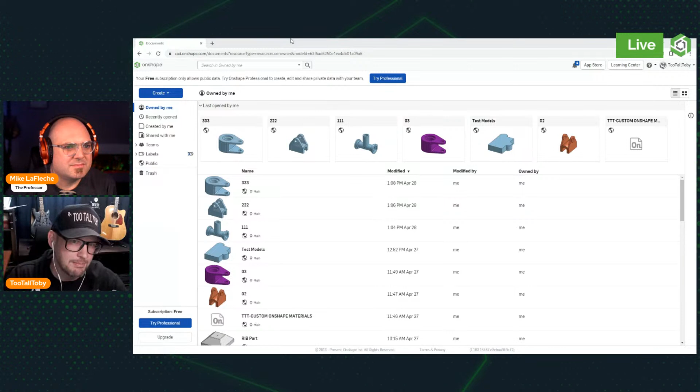The account I'm looking at on screen right now is from onshape.com/free, a totally free account. If you want to start using Onshape today, practicing and learning 3D CAD, or learning what Onshape can do, you can check out the free version. And when you and your team are ready to move up, you can even do a trial of the professional version, and you'll get even more collaboration capabilities.

For starters, just using the free version. I'm using the free version today. Mike, you're using the free version as well? That's right, I dusted it off, I haven't signed in a while to my free Michael LaFleche account. So everyone who's watching, if you want to do this and you've got some coworkers or some friends, or if you want to call your mom and say, hey mom, can you help me try out this new software, whatever it is, you can try this out totally for free.

So I'm going to start out by creating a new document. I'll call this Toby's coffee mug. Yep, totally okay to use any kind of naming, you know, old habits die hard. Okay, yeah, there you go. Toby's coffee mug, you could put an emoji if you want to, it's okay. I'm just gonna leave it at that. So we'll go Toby's coffee mug.

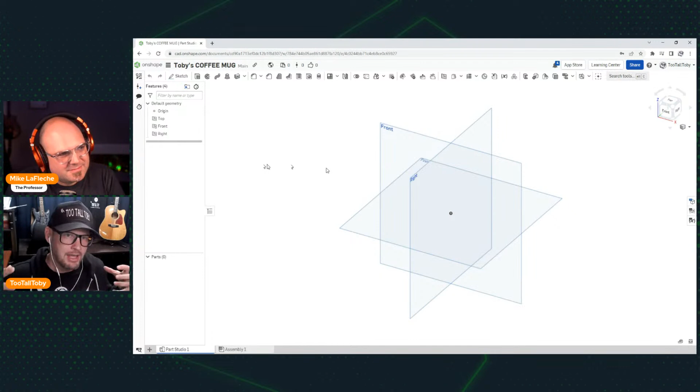And now I'm creating a new document. This isn't necessarily a single part, it's a document - kind of like a project. You can have one single part if you wanted to, you could have multiple parts, you could have an assembly, you could have drawings - whatever you want that's going to be part of this project can all be included under this one umbrella, Toby's coffee mug.

From here, I'm going to select the front plane and begin a sketch. This is very similar to maybe what you've seen in some other CAD packages. We get in here, we create our initial geometry. In this case, I'm going to create a center line, and have that come up to the height that's kind of the gap at the bottom of the coffee mug. Then I'll go through and create some additional line geometry to set me up to create a revolve feature in Onshape.

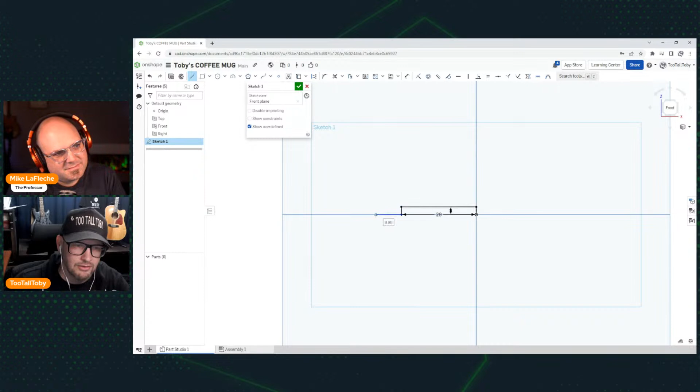So I'm going to use some basic arithmetic in the auto dimension functionality, taking the desired diameter and just dividing it in half. I'll create some more auto dimensioning here. This auto dimensioning is super helpful and definitely a skill worth developing, because you'll save yourself so much time if you take the time to hone that skill. For example, the width at the top here is going to be 4 millimeters. This is going to come down at a slight taper, and then I'll close this thing off.

All I need to do now is add a few final dimensions to fully define this sketch. We always want our sketches to be fully defined. So here I'll create a dimension that actually connects to the center line or the center plane.

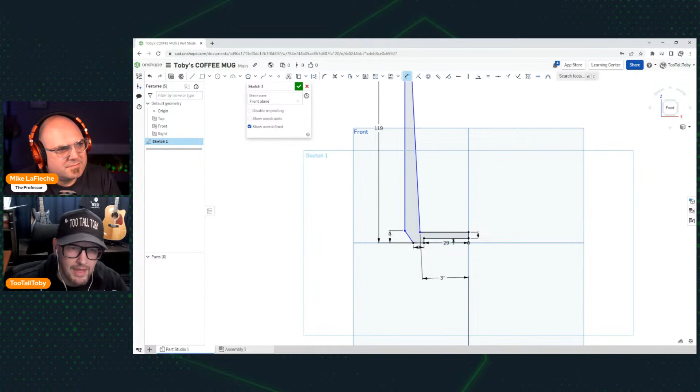Here what I'm doing is holding the control key on my keyboard and middle mouse buttoning to drag - a great way to navigate your sketches if they have a very large aspect ratio or go off the screen. Here you can see I'm using what's called the S key menu to access all my most commonly used commands. So instead of needing to remember, say, 10 different shortcuts, I only need to remember one, and I can load that up with my most commonly used commands - another really helpful tool in Onshape.

And then finally, I created that construction line in the beginning. If I create a dimension that goes across that construction line, that's going to give me what's called a doubled dimension. So when I'm defining the max diameter of this thing, I can define it at a dimension that's going to make sense to people. Certainly I could use that same functionality for some of the other dimensions to get the doubled dimension, but I think this looks pretty good.

I think I'm going to turn this into a revolve feature now. Yep, turned black - you had the shaded region, told you that it was nice, fully constrained profile, and there you go. You just have to pick the edge and go. Yeah, that's what we want.

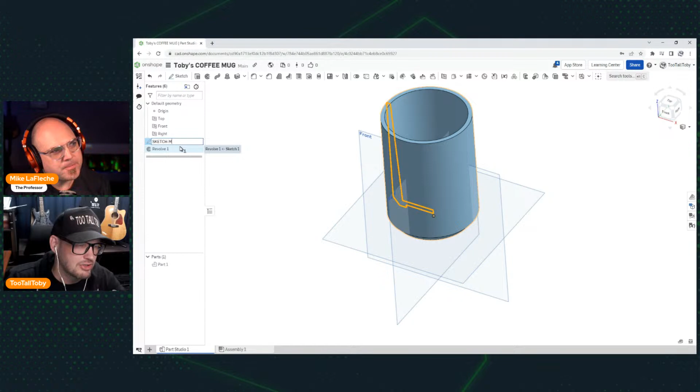For me, I do a lot of renaming. There's two ways that I found to do renaming. So I might call this one sketch, main revolve - that's one way you could do a right mouse button rename. The other way is I can double click on the feature and that brings up this box here, and then I could rename it here.

Are there any other ways to rename, Mike? Well, those are the two places you would do it. So I often do it like right as I'm making the feature, because it's right there as you're making the feature. Yeah, that makes sense.

All right, well, we've now come to the part of the presentation where we're ready to turn this into multiplayer simultaneous 3D CAD. So let's get into it now.

What I'd like to do is invite you to participate in this document. The way that I would normally do this is I would just come up here and hit this blue button that says share. Is that basically the way that you would do it? That's one way of doing it. Another way - let's put our hat on - if we're working for Coffee Mug Incorporated, you might ask me a question about the mug, right?

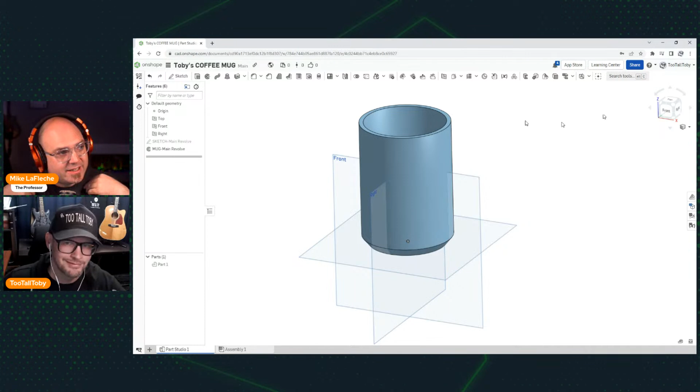Sure, using a comment. You comment on the mug somewhere and you might say, hey Mike, we're interested in putting a lid on here or something like that. Comments are a great way to do that. You can right mouse click on a feature, which will automatically tag it to that feature, a very clever way of doing that. I like that, and just like in Google Docs or Microsoft Office, you can @ somebody in. Any of these cloud type systems work like this.

And there we are - let's add a lid to the mug and add that comment. I'm going to get a notification once you hit this button to share with me, and it will share me in view only. This design essentially, and then so view only. So now that I've added you in the comment and tagged you there, you're going to be able to see - oh look, I just saw your icon here show up. Hey, how you doing?

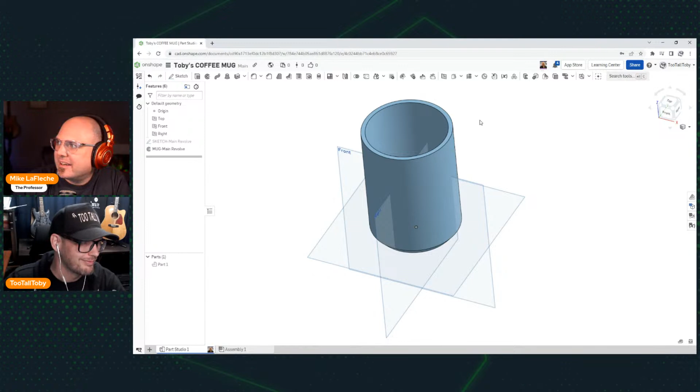So up here, I see your icon there. I can see the comment that came in and I can click it, and I can even double click on your face, or you could double click on my face, and you're going to essentially look over my shoulder. Oh okay, right, so now I'm not doing anything with the mouse.

A lot of this would be cool if we were on a voice chat together - if we jumped into Slack or Discord, jumped onto a voice chat, then you and I can talk through this model and very clearly communicate what one another is thinking without having to start up a Zoom call or anything. I can even just call you on the phone, right? Exactly, you just pick your communicative poison and go at it.

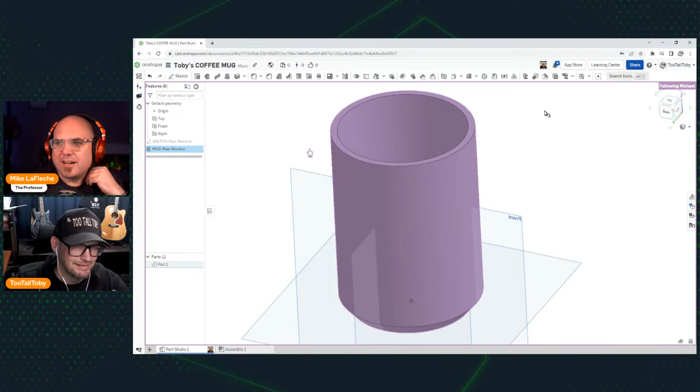But having this nice view where you can see what I'm looking at - you can see even what I'm pointing at, see the cursor changes to a finger, right? And you can just click anywhere on the screen and it would take back your viewpoint. So if you wanted to look at the underside or anything else, you just kind of take over. It's much easier to see what I'm doing - as I'm rotating, does that happen on your screen as well? Let me double click here and now you can see that I'm following you.

Okay, it's not like that Sting song where I'll be watching you and you don't know. Yeah, we know, you know, right? You can see I'm here, and it even told you.

So then I could say, hey Michael, thanks for following me. What I really would like to do is put a lid on here. I'm going to draw the handle here on the front plane. So maybe it would make sense if you built the hinge for the lid over here on the right plane, something like that.

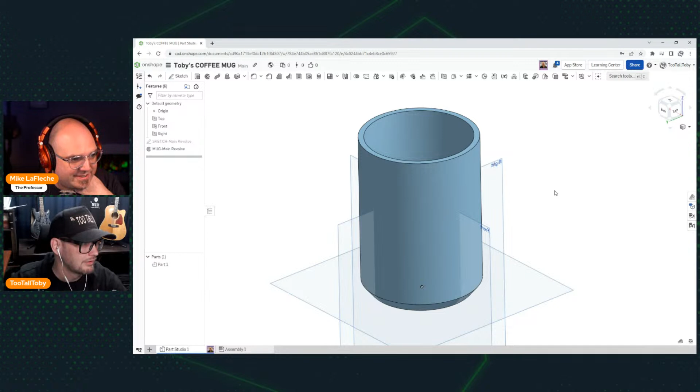And you can see what I'm highlighting. Even though we're not screen sharing, you could still see everything that I'm highlighting. I mean, just to show you, I'll put my screen up here for a second.

Just so you can see what my screen looks like. So my screen, I'm view only in the document right now, because that's the way it's shared initially. You share with the most conservative permission, and then you can give me any additional rights that you want. So I'm moving it on my screen and you can see what I'm doing on your screen.

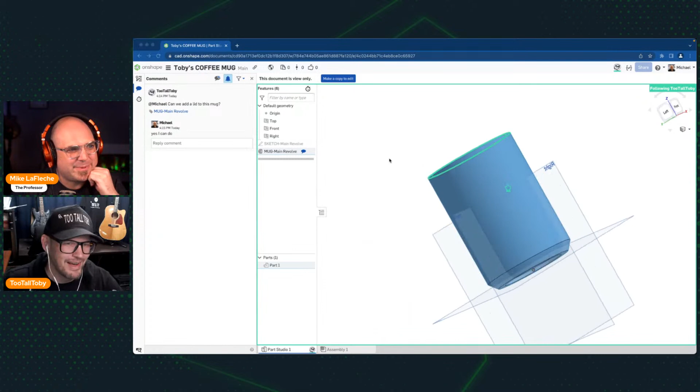That's very cool. So we don't even have to screen share, we can just talk about this. I could say, hey Mike, let's add the lid up here. Let's make the hinge for the lid here on the right plane. You can see right away what I'm doing.

And it looks like, if I'm not mistaken, in the upper left on your screen, are those Mac icons? Oh yeah, that's right, I'm on a Mac. So you're on a Mac, I'm on a PC, and no problem with us playing multiplayer. Yeah, multiplayer cross-platform, okay, I like it. All right, I'm gonna add it back as the main window now.

Okay, all right, so we discuss our game plan. We're gonna say, I'm gonna draw the handle here on the front plane, you're gonna do the hinge here on the right plane. And now, what if you were to start? Can you just start modeling now? Are we good to go? Is that it? Not yet.

You need to just update my sharing permissions on the big blue share button now, because you're view only still. All right, cool. So we'll do share, and here is... those should look familiar, right? I mean, this screen looks exactly like any cloud-based sharing. So if you hit that pencil, you can go from view to edit.

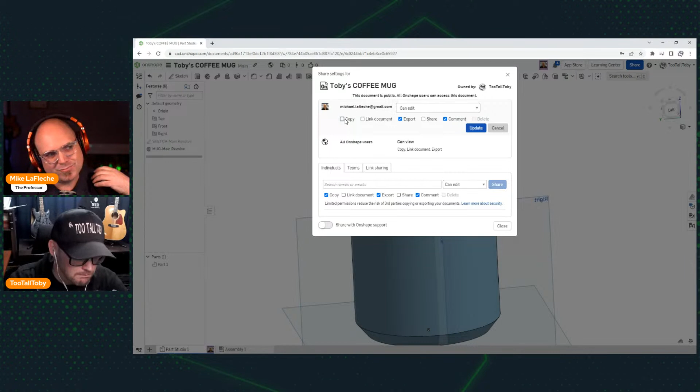And you can also tick off or on any of these really interesting choices that, if you really think about it, you don't have in a file-based system. If you send somebody a file, you can't stop them from copying it, and you can't stop them from opening it in another system and exporting it. So these are much different levels of permission.

So if I uncheck this, then you're not going to be able to just make a step file and take it out of our system. I could uncheck these to make sure that it just stays within our team.

All right, well, I'm going to say can edit. I know everybody's excited to see what happens if you make a feature. So here I am looking at this model, I'm not doing anything on my screen, my hands are up here. And if we notice over here on the left, we can see that Onshape is letting us know that Mike is making a new feature now. This is really what it comes down to, this idea of multiplayer simultaneous 3D CAD.

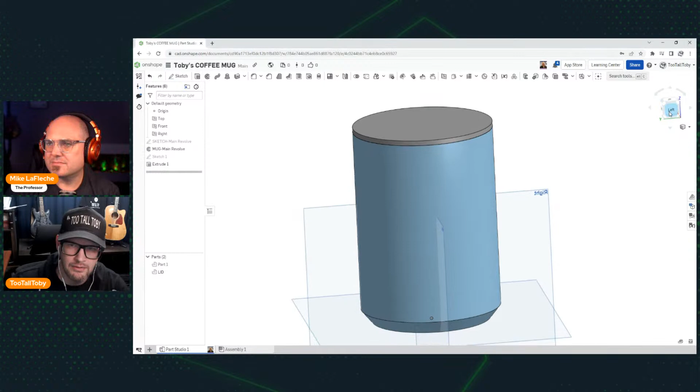So while Michael's going through making that feature, I'm going to take a look at the questions here that came in. Question from All Day says, does the tripod in the upper right corner change the view? Yes, it does. You just click on the little cube here, and you can use that to get into the specific view that you're hoping for.

And wow, look, it looks like we've got a new feature on this model. So Mike was able to get in there and make a new feature.

And like I said in the beginning, the cool thing about Onshape is that it can either be a single part file environment or multiple parts in one single environment. You're really not limited. In this case, we can see that Mike decided to make the lid here as a new part, almost like a new body, but really it's a new part in the part studio.

That's right. The way it works is it's kind of like top-down modeling, where you can create multiple parts together that are contextually related. You wouldn't design a 787 airliner in one part studio, but you might go into the flight deck and model several parts of a control device, a stick or whatever it might be, together because they're related. You don't have to split things out into separate files when you do it this way in Onshape, because everything's a database operation.

But in this case, you made a new part essentially. What about the mug? Are you able to actually add features to the mug part, like a flange where you're gonna have the hinge or something like that?

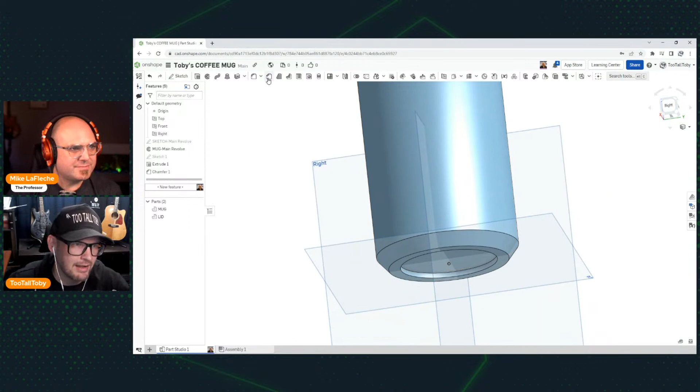Yeah, totally. I'm renaming it to the mug now because seeing it called part 1 was freaking me out. Now I can actually go in and start modeling things for the mug as well. I might be down here towards the bottom adding a fillet, just a regular old plain Jane fillet here at the bottom.

Yeah, that looks pretty good. Round that off a little bit at the bottom. And I'm down here making features, working through this part. What's gonna happen if you're working on that part at the same time? Is everything gonna go crazy?

Oh, I see a new sketch was created. Yep, so there's a new sketch, cool, right? And I am extruding a new part right here. One other thing, let me just fix that sketch a little bit. Yeah, you might end up with a zero thickness there. Rookie mistake.

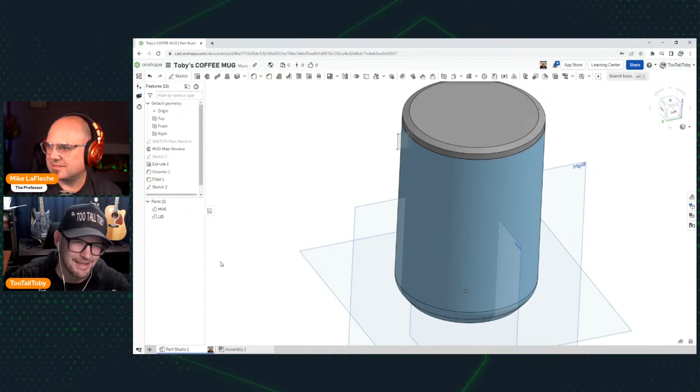Eduardo in the chat is saying, Hey Toby, when you see branches and merges, you're gonna love it. Yeah, I've already seen a little bit of it, Eduardo, but I know that is absolutely where I want to be. It's just like GitHub, so I'm definitely in.

But I just extruded that, and I told it to attach itself to the mug and not the lid. So when you extrude something, if you double click extrude to there, Toby, you'll see. I created a new solid and I just extruded it symmetrically, and I told it the merge scope was with the mug instead of the lid in this case.

Okay, so now that's part of this, I hid the lid here on my screen. Yeah, that's part of this same part. So I'm down here working in one section of this part, adding fillets, and you're up here adding boss extrude geometry, cut extrude geometry. And yeah, there's no problem.

No problem. Go to the version tree there. So cool, you see the version tree at the top? You can create versions, but see that? If you hit show changes, it'll show each individual edit and who did what and when. Wow, right? It even shows me hiding and showing that lid, huh? Yeah, so everything is an operation. If you click into it, it brings you to that moment in time.

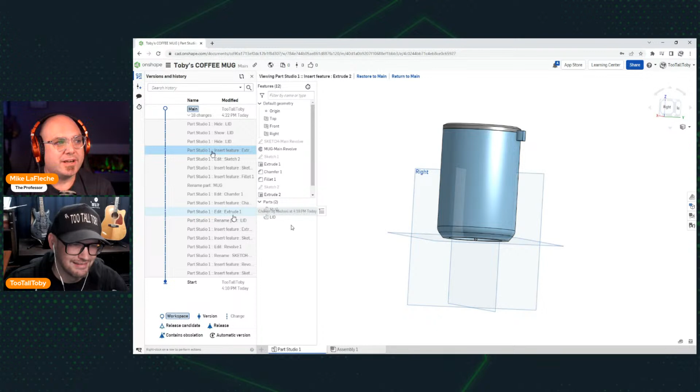Okay, wow, so this is like unlimited undo. Unlimited undo forever and ever, right? Even after you close the session, right? It's the entire history tree, and you can look at it in any moment. This is not something that's available in any other system that I can think of.

So this button up here can almost be like a learning tool, right? Because in the Onshape documents page, there's a section called public where you can see all the documents that are public. And if there was something in there that you looked at and thought was really cool, you could actually roll through step by step and see how the person built it. Yeah, wow, that is powerful.

And you can even create versions from these and branch off, as Eduardo was mentioning. So instead of doing a save as copy or a pack and go, you would just branch from whatever the latest moment is, or any other moment in the past, and try something new from that point in time.

All right, cool. Well, I think what I'm going to do is let you start working on the lid, and I'll go through and work on the mug. But we do have some good questions coming in.

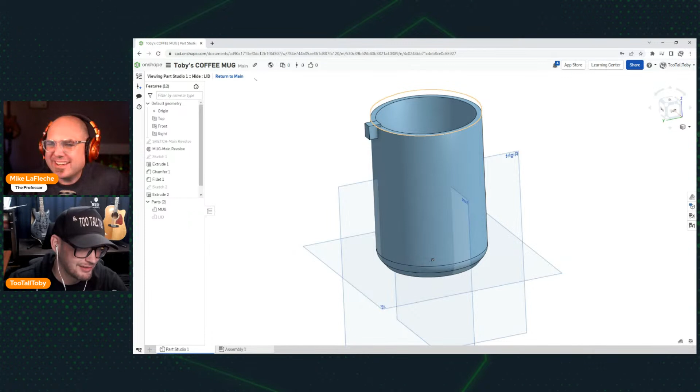One question was about MBD, model-based definition. It's a pretty cool subject where you can have 3D dimensional information on your model instead of a 2D drawing. Most people would use it for that. Most people in the world of Onshape still want drawings, so we didn't make MBD yet. We do kind of sort of do some model-based things, if you will, but I wouldn't call it what people are asking for with model-based definition.

But take a look, we don't have any holes in here yet. I'm going to put some holes in a second to put a pin in for the hinge, and I'll show that later. We'll come back to that.

Model-based definition, of course, can be a way of getting away from drawings, but it can also be used in coordination with drawings. Ultimately, when you get deeper into MBD, you learn it gives you a little less chance of failure during the inspection process. The inspection process isn't as rigid, but it's more meaningful the way you do the inspection. It allows you to do a more mature version of the inspection process once you really learn about MBD. It's good, not in Onshape yet, but on the roadmap.

Very good to hear. Alrighty, and I'm looking here, I see some nice comments from Patrick. I'm going to save them for the end and just keep looking through to see if there are any other questions.

Does anyone know if there's an easy way to export different part types, like sheet metal parts, for milling parts? Well, certainly, whenever you're in Onshape, you can take your part studio down here in the tab at the bottom, right mouse button, and choose export. So that's a way for you to... oh, I wonder if I somehow disabled the export.

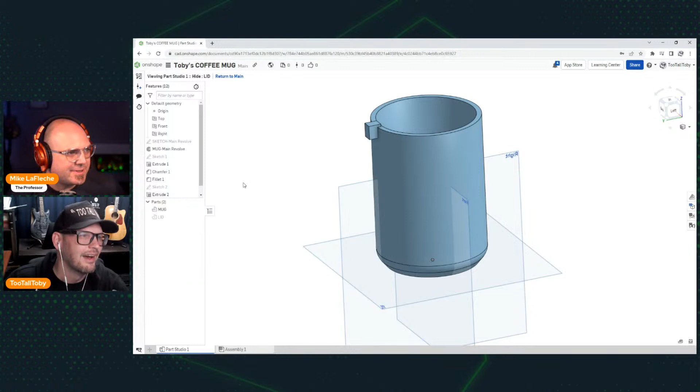Oh well, you're in just a version right now, so hit return to main up there at the top, it's in blue, or you can click that too. So then if we go down here to this tab, you can right mouse button and choose export, and that should get you out to some exporting options. If it's sheet metal, you'd want to turn it into a flat first, and then take a look at your exporting options.

Yeah, some great discussion in here. I know you guys are discussing some things on your own as well, so I'm going to let you keep discussing. I'm not going to necessarily jump in, but I see you guys did continue with that discussion, I love it. Eduardo has to drop, I'll see you later, bro.

Toby, what fundamental features in SolidWorks are missing from Onshape that you would like to see implemented? I think there was one thing I was thinking about, and I can't remember what it was. There's a lot of stuff obviously in a CAD system, and since we started with a clean sheet of paper, we may have things that aren't in the old systems, but vice versa, there are things not in Onshape that might be in other systems because we do it a different way.

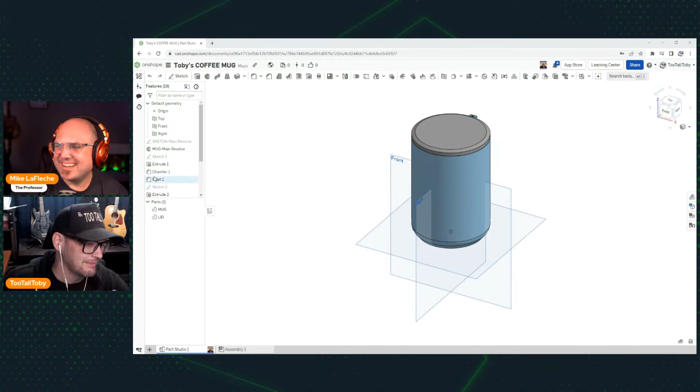Or, you know what it was? Actually it was something I was thinking about earlier today when we were talking, it was being able to press F2 when you go into rename. I kept thinking, what is the shortcut to rename in Onshape? That was honestly the biggest thing. Whenever I go to the tree, I keep pressing F2 and I'm like, oh come on, I should be able to rename with F2. It's Shift N. Okay, let's go, I like it, we're going to be using that for this whole presentation.

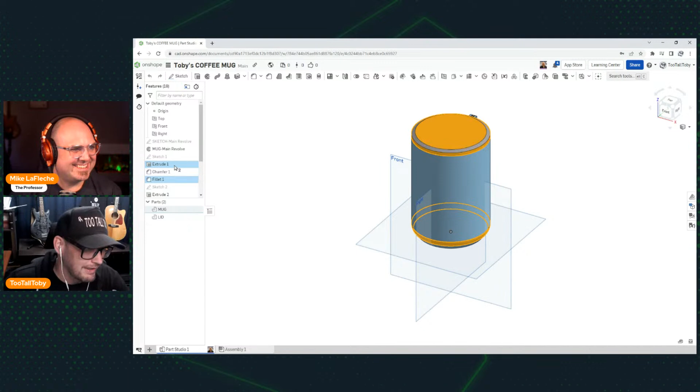Okay, so this fillet here, with Shift N, is the lower outer body fillet. Okay, all right, I'm happy now. So to answer your question, nothing, there's nothing in SolidWorks that is missing from Onshape. That was the only one, and I can adjust to Shift N from F2. So we're golden there.

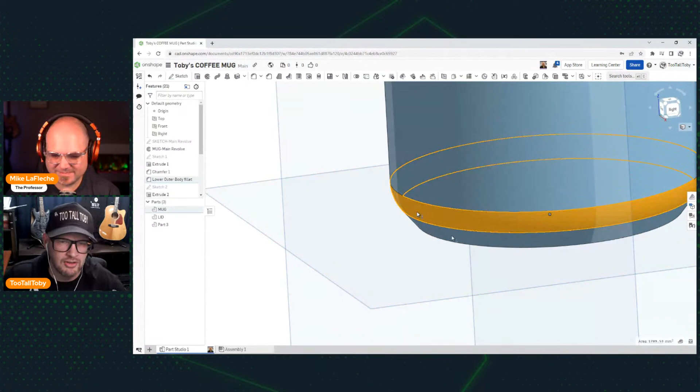This feature here was just a standard fillet, tangent to this face, and that was it. Now I'm going to create another feature down at the bottom underneath the model. I'll press the S key, jump into my fillet command, and create a fillet here with a 10 millimeter radius.

As we can see from the preview, we are losing the original edge in order to get that fillet in place. This is a fillet overflow scenario—something you should be aware of when working with the fillet command in any CAD system, and you should be aware of how the CAD system is going to respond. The original edge is being moved to facilitate that fillet size; it's a little bit too large.

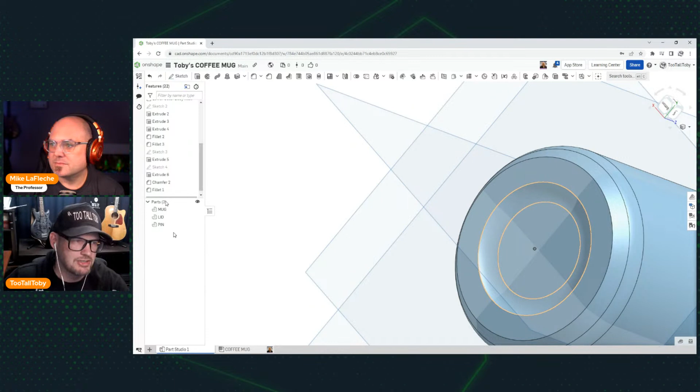If we click on this edge, we can see that's giving us a distance of a little over 52 millimeters. But in the definition of that fillet, there's an option here for allow edge overflow.

I'm going to try and zoom in here and see if that comes through on the live stream. I just want to make sure I'm watching my monitoring here. But you can see in the fillet property manager, there's this option for allow edge overflow.

When allow edge overflow is checked on, that means it's going to adjust that option. So if I uncheck that, you see the edge goes back to the original distance, the original dimension here, which was a dimension of 58. That's the dimension coming from my sketch.

That's the first thing I wanted to show you with fillets. I'm going to pick on this fillet in the tree here and shift N so I can rename it. I'll call that lowermost fillet, underside fillet—and that one is using that kind of overflow fillet type.

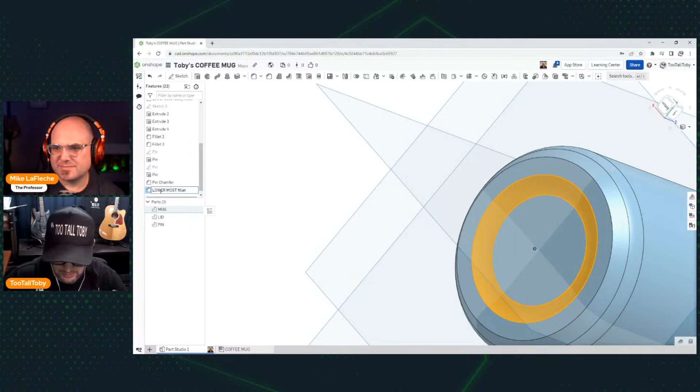I'll do a shift N here again and call this one overflow fillet, meaning that the radius was too large for the surrounding geometry, but Onshape has no problem solving that geometry.

Now, another type of fillet you can utilize in Onshape—I think this is really cool. I'm going to right mouse button on this right plane and choose section view right from the right mouse button command, so we can take a look inside and see what's going on. Now I'm going to add another fillet command and add a fillet to this lower edge on the inside.

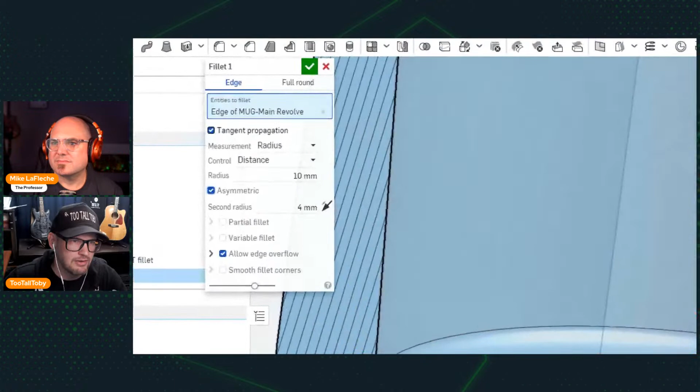Instead of this being a complete round fillet using constant radius throughout, I'm going to change this option for asymmetric. When I choose asymmetric, now I have two different radii. If we look at the fillet itself, the fillet has become more of an ellipse than a constant arc.

That's another really powerful tool in Onshape. If you're ever in a spot where you need something non-uniform or non-symmetric—you don't want it to be a constant arc, usually in spots where you want it rounded, but because of other faces in that region you just can't fit the radius you want—sometimes if you switch to asymmetric, you can get the fillet you need and still have that rounding off.

So that's another type of fillet that's good to know about in Onshape, the asymmetric. I'll call this one lower inner fillet.

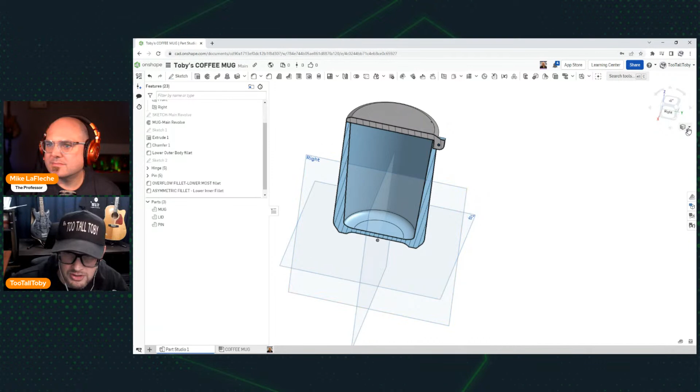And then the final type of fillet that I just wanted to tell you guys about, so you know it exists here in Onshape. I'll switch back from the section view and hide the lid. We can see Mike's still going through, making great progress with the lid and the hinge, and even adding in a pin.

But another type of fillet option we've got is full round. We can see that the full round option is on this other tab. We just pick our two sides to fillet, and then pick this top face here. I really like how Onshape just auto advances through that process.

Normally that would round off this top face, but it's going to run into a challenge here because of this hinge. So I might need to roll back earlier in the design to do that full round fillet. Let's see what happens. I don't know if that'll affect Mike, but if it does, it's fear free, I'm not going to lose anything.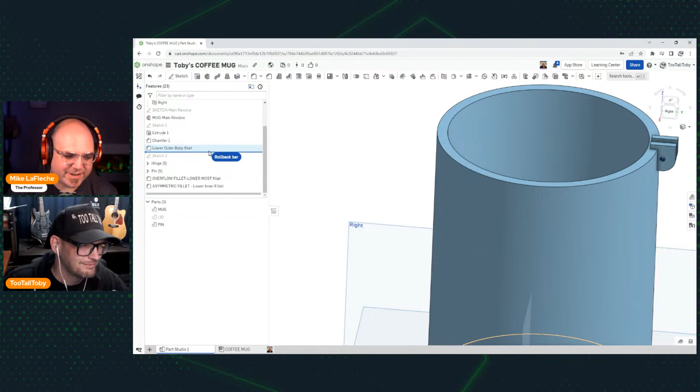Yeah, exactly. So we can say full round fillet, this face, and this face. You just pick the 1, 2, 3 faces and hit the check mark. And there we go, we get a full round fillet.

The nice thing is that's dependent on the angle of this interface, because I put that draft on. It's not a constant radius or necessarily an easily defined radius, but it's still able to do that full round fillet, no problem. It just bases that on the other geometry.

So we'll call this one full round fillet, top lip. Sometimes we want to keep this type of geometry, sometimes we want to suppress it.

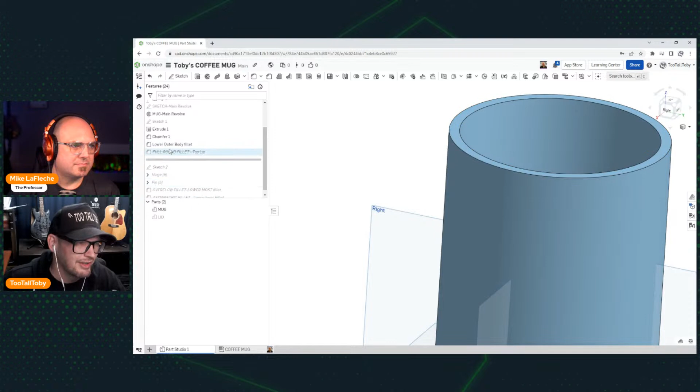If we right mouse button here, we can choose suppress. I like the way Onshape gives you a line right through that feature, so you know it's suppressed. We could also unsuppress it to see the downstream ramifications, and in this case it doesn't look like there's any. It just works.

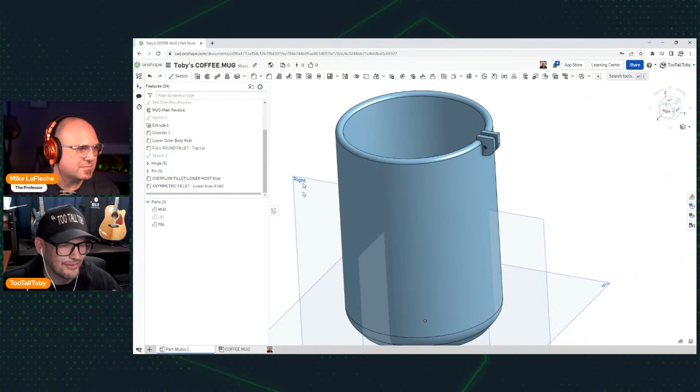Yep, looks like everything works. My assembly is still working. I've been building an assembly while you're doing this too. Oh, wow, okay, I can't wait to see that. So you're building an assembly while I'm in here building the part. Yeah, I could see my assembly updating with all your changes while you're doing that.

So there's no question about what the latest state of a design is. There's no hieroglyphic system in PDM, no 'do I have the latest version', no 'do I need to reload', no 'do I need to open and get the file'. None of that enters my mind anymore, it's just there. Very cool, very, very cool.

All right, let's get in here and start making the next feature, the handle for this thing. So I'm going to hide the lid again, I'm just hiding and showing these different parts of this design. I'm going to go to the front plane and begin a sketch there.

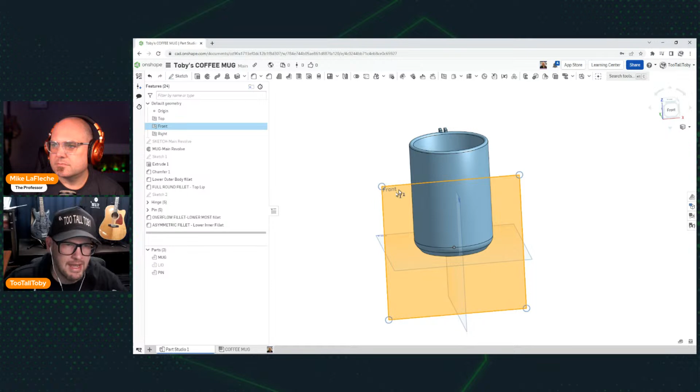Then I'm going to look for the insert picture command, but I'm not really sure where that is in Onshape since I'm not that familiar with it. So I can use the search tools functionality in the upper right and type in something like 'picture'. It asks, do you mean insert DXF or DWG? No. Do you mean insert image? Yes. So even though it wasn't the right word, everything's keyworded so that as long as you get close, Onshape directs you to the command.

So I'll do insert image here, it looks like it's in one of these flyout menus, and I'll click it to begin the command. Now I'm ready to import an image. I'm going to import this image I took of the World's Best Sister-in-Law mug here.

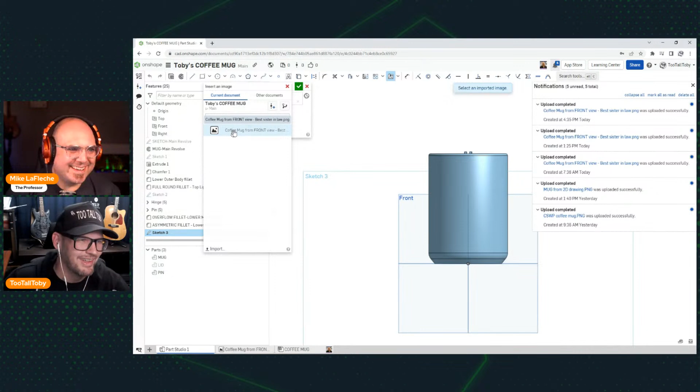So we bring this in, and Onshape says draw an image rectangle. I'll get in here and just draw one. We can see that it automatically sizes the image to the rectangle I drew. What's nice is that this rectangle has parameters, it's parametric, meaning I can assign relationships to it.

So in this case, I took the picture and cropped it, but I left just a little bit of a buffer around the outside, so I can include that in my dimension, which in this case is about 2.5 millimeters. Then I can resize the image and it kind of stays on that lower line based on that 2.5 millimeters, and ultimately I can get this thing more or less in place.

Of course, you're always going to be dealing with things like distortion from perspective when you try to take photos and bring them into a CAD system. But we can mitigate that as best we can and leave ourselves with a result that should work out pretty well. So now that I've got that image in place, I'm ready to get in.

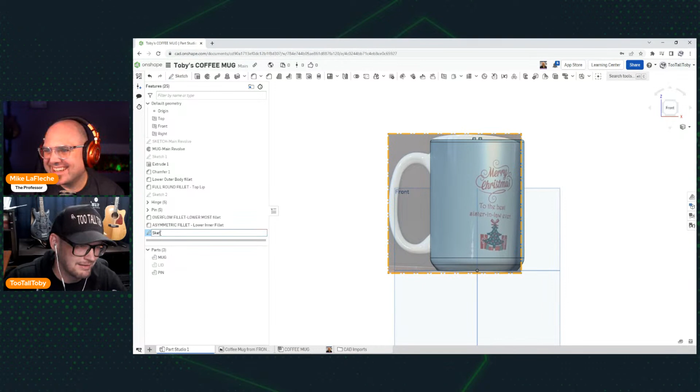I'm going to Shift N, my new favorite shortcut. I'm going to call this one a sketch, image of mug. And then I'm going to once again go to the front plane and begin a sketch.

Now I'm going to create some splines, and we're going to use this Bezier spline option. This is called different things in different CAD packages, but in this case, what it means is that instead of drawing a spline by dropping in points and getting the spline right away, you create a spline by really creating kind of a polygon. So we've got these control points here that we can drag around in order to get the desired result.

And we can also add relationships to these control points. So for example, I could take these two control points here and make them vertical, and that's going to help me when I go to mirror the handle a little bit later on in this project. And so we can drag these points around.

We can add sketch relationships, we can add dimensions to these things. I don't think it necessarily has to exactly follow that existing curve. I think if I can just get it close, it'll make me happy.

One thing about Onshape that I learned, which I think is really helpful, is that I don't have to do these two separate curves in separate sketches. So I could just make this one curve here, maybe give it a dimension from, in this case, I'm actually dimensioning it to that rectangle that I used to size the image. And then I can also lock down a location for this thing.

Actually, I want that to be from the bottom of the mug to that point there. And so now I've got a nice location that represents the very center of that handle. I'll make that a little bit higher—I think I'll make it like 62. There we go, and I've got a nice spline here, which is more or less following the handle.

Now what I can do is I can create another Bezier spline right over here, and I can give this one a horizontal relationship to the original. I can give it a coincident relationship to this vertical line here because I'm just kind of following that outer perimeter of the layout image.

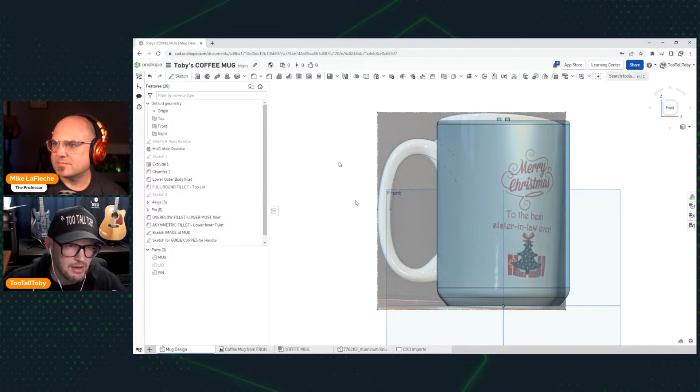And now from here, what I can do is I can create some planes. So I'm going to create a plane here using the curve and point option, and that's going to be a plane that I'm going to create right here at the end point of this curve. Then I'm going to do another plane, this time using the plane point option—just some different ways of creating planes here in Onshape. This is going to be parallel to the top plane, and it's going to exist at this point here.

Now that I've got those two planes, these would be renamed—this would be something like plane for profile 2.

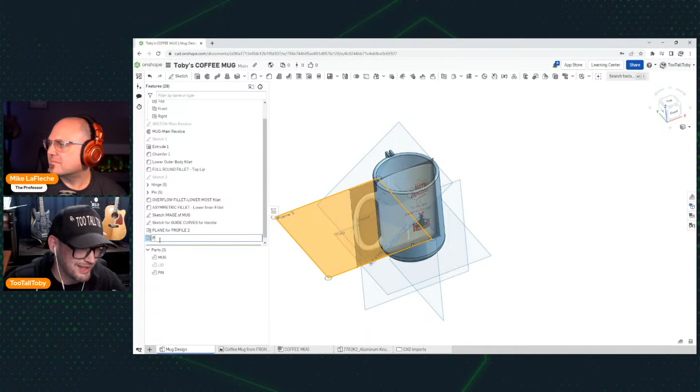And this would be something like plane for profile 1. I pressed F2 again there by accident. Profile 1, there we go. You want to rename those planes.

It's always good to rename your planes. And then on this plane here, I'm going to begin a sketch, and I'm going to create an ellipse.

One thing I noticed about the ellipse command in Onshape is that it automatically knows where the quadrant points are supposed to be. But sometimes it's still helpful to go in and drop a point manually, and you can pick up a relationship to the quadrant point. That can be helpful in this case to pierce that profile to the guide curve.

It can also be helpful for things like alignment. If you ever create an ellipse in Onshape and need to establish the alignment, you could take these two points here and make them horizontal. That's going to help avoid this thing from spinning or twisting along the loft. Piercing this to the guide curves is also certainly going to help it from twisting along the loft, but it's just a little something I noticed that's a bit different from other CAD packages I've worked in.

And then we can add in our max dimension here for that ellipse. I think that's going to be about 16.5 — that's what I measured on the physical model. Of course, we're just using this physical model, this best sister-in-law ever, as a foundation to set us up for the custom version that we create later.

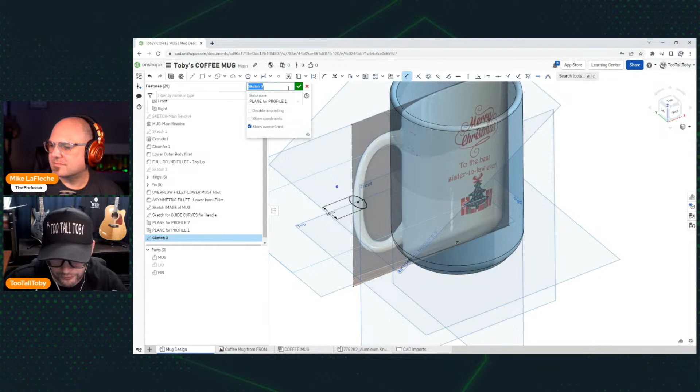And so that gives us our sketch here. Like Mike mentioned earlier, I could also rename this one to sketch profile 1, something like that. And then I hit the green check mark. And then what I like to do at this point is right mouse button on that sketch and choose copy sketch.

And then I can choose my plane for profile 2, and I can choose to paste sketch. That saves me the step of having to draw that extra point in there, or anything I already did, maybe the dimension that represents the width of that. I already have that dimension there waiting for me. And this point, I can just kind of drop right onto that quadrant point.

So now I'm ready to pierce that quadrant point to my guide curve, pierce that into place, and then I'll pierce down here into this guide curve. That gives us our ellipse in that location, and I think that's looking pretty good. Yeah, and that's great — that was nice and quick too.

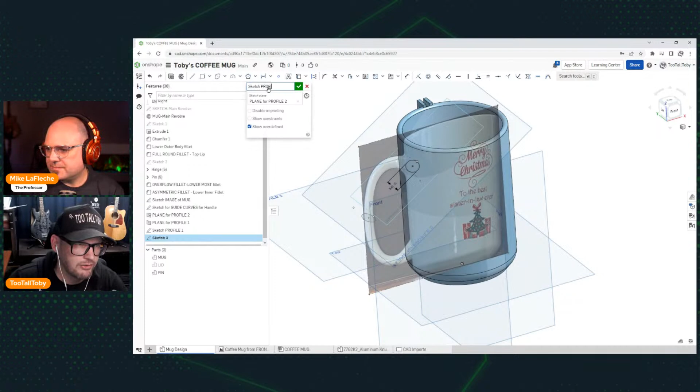So we'll call this one sketch profile 2, and let's turn that into a loft. So now we're going to use the loft command in Onshape, and we're going to say that we're going to loft from this profile to this profile here.

There's a couple ways we can pick this profile on the inside, but in this case it doesn't really matter where I select that profile, because I'm going to be using the guide curves to help establish this path. So when I choose this guide curve here, you can see this ellipse is blending into this ellipse, but following that guide curve on the inside. Then I'll choose this guide curve here as well. And wow, that looks pretty good.

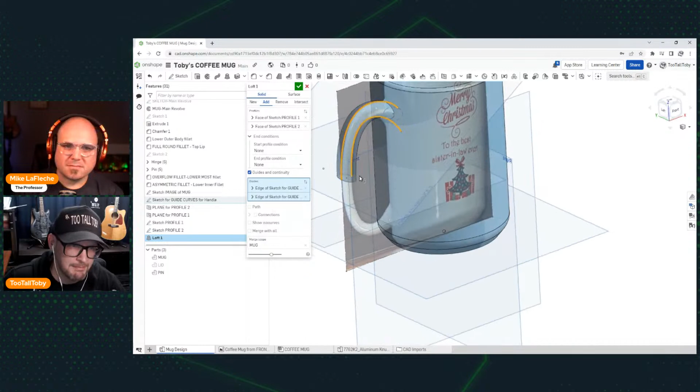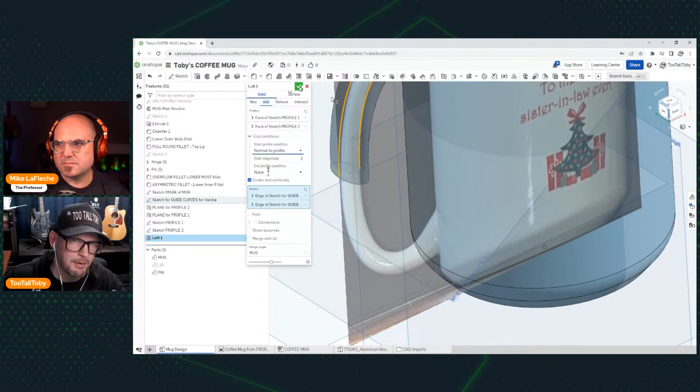Now, when I created those splines, I created a vertical relationship so the spline starts out going perpendicular to my sketch plane. But there's an option when you're in the loft to say I want all the faces, the entire face running around the perimeter of this loft, to start out perpendicular to my sketch plane. We can do that using this option here, normal to profile. It's a subtle difference, but you'll notice it when you go to mirror if they aren't set up to be exactly perpendicular to that sketch plane, because that's also going to be our mirror plane.

So we can hit the green check mark here. We can shift-N on that feature, and we can call that handle loft for mug. I think I spelled handle wrong — I'm leaving it, a little signature.

So now at this point, we could use the P command to hide all the planes. We could also hide this sketch here for the image of the mug. This is really coming together nicely. We're going to have to do a little bit of cleanup on the inside — I'll get there in just a moment. But the last thing I want to show you before we jump back to the multiplayer simultaneous session is one last fillet option.

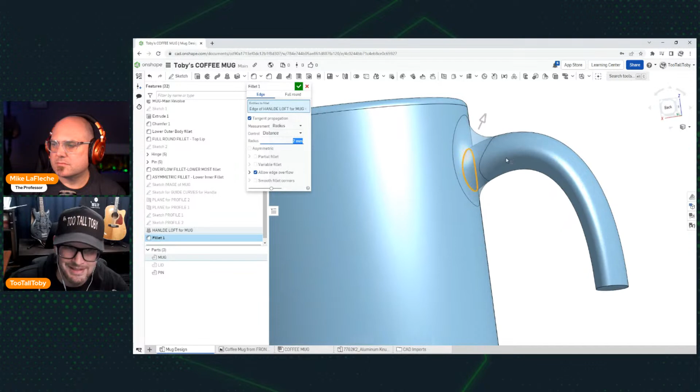And that's the option for what's called constant width. Let's say we're going to create a fillet here with a radius of 7 millimeters. This fillet looks okay, but you'll notice it looks a little heavier on the top and less so on the bottom. That's because the way this handle is merging into the body, it's coming in at a lot of different angles. So even though it's a constant radius all the way through, in my opinion, aesthetically, it just doesn't look good.

So what I can do is change this option here from radius to width. Now what I'm doing is saying I want the chord width to be constant all around this fillet. Let's make that the same value of 7, just so we can compare apples to apples. But I just think that looks so much better. It looks so much cleaner.

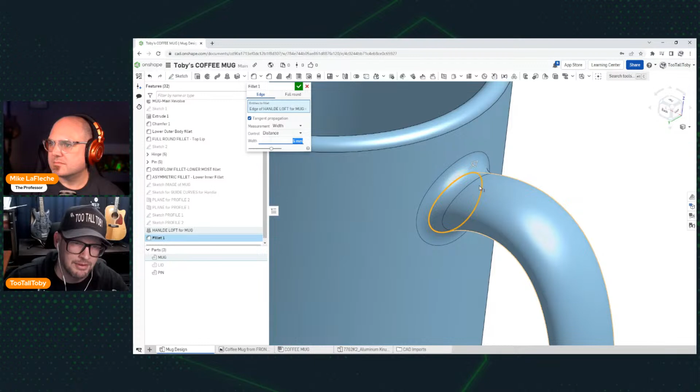Especially if we dial it down even further, to like 5 millimeters. Now it is a non-uniform radius, a variable radius running around the outside of this to maintain that chord distance. But aesthetically, you're going to find a lot of spaces where this looks really good. When you've got a lot of different angles coming together, draft coming into pockets, into corners, this is a great option to know about because it can really clean up your designs and make them look very aesthetically pleasing.

And if you're really working with somebody who's concerned about curvature and continuity, you can go in here under control and change that to curvature. Now you can see the profile is no longer an arc, but more of a spline where it's starting out trying to match the curvature of the handle, then blending into the radius, and then blending into this face up here, matching the curvature of the mug itself. That's how you can get even more dialed in with regards to curvature and making sure you have matching curvature. And you can't see edges as well.

If you hold this thing under a lot of lighting, if it didn't have that curvature continuous, you might actually see a slight seam there. This will really help to prevent that as well.

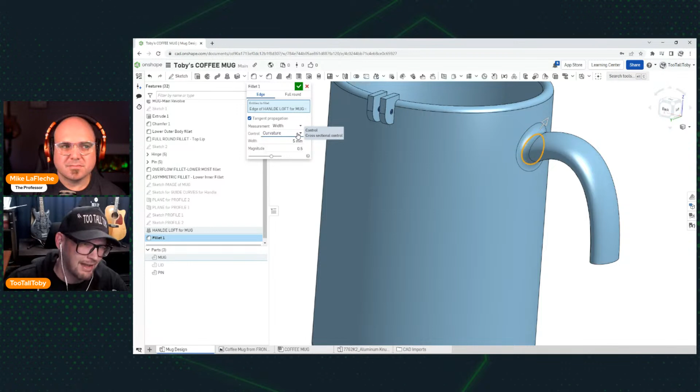So that gives me those features, and I think I'm ready now to mirror those features. Let's rename this one. We'll call this one constant width fillet at top of handle.

Yeah, Patrick's making a good point here. It says constant width is good for aesthetics, but can be very difficult to define precisely. Yeah, you're absolutely right. It's one of those features that you really aren't going to be able to measure and convey to a machinist. It's something they're going to have to do with multi-axis CNC in order to really get it correct. It's not something you're going to be able to necessarily inspect. It's more like, if it looks good, it is good.

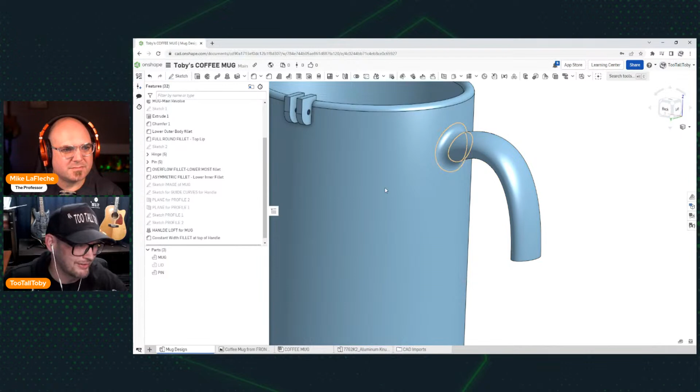Great point there. And so now the final feature that I think I need to do here is just a mirror, a feature mirror. This will be of the handle and of that fillet. And then the mirror plane could be this face here that I created. Look at that, I love the way Onshape gives us that nice preview.

There's also a trick here in the view settings where you can go to your tangent edges and say show your tangent edges in Phantom. That's a good way to check to see if you have any hard edges on your model. Or you can even take it a step further, go to tangent edges and just say hidden. Now anytime there's a hard edge, it'll show up. Like we can see here, this hinge that's got a hard edge.

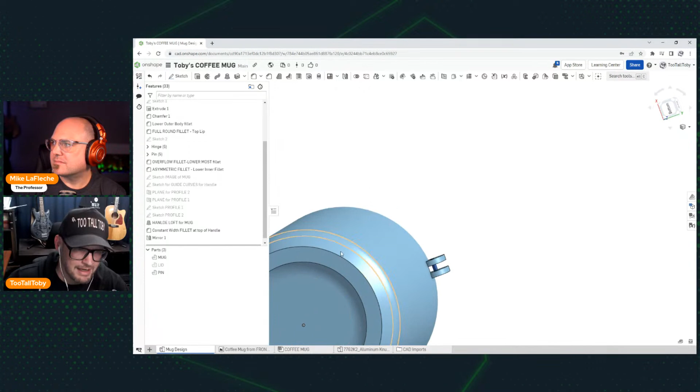We can see these extra faces on the inside are a hard edge. Down here at the bottom, these are hard edges. But certainly where the handle is merging together, it's a nice smooth blend. And that's what we wanted.

And I know I said that was my last feature, but I know you guys really want an encore here. So one final feature I'm going to do is what's called a delete face command. Delete face is a welcome addition to any CAD package or workflow. It will go through and help you clear up these extra faces that are sticking out. Here, I'm going to right mouse button and do a select other to get that face that's on the underside.

So we'll get that face down there, and then we'll get this face here and hit the green check mark, and boom, Onshape was able to completely clean up that inside, and that is a mug.

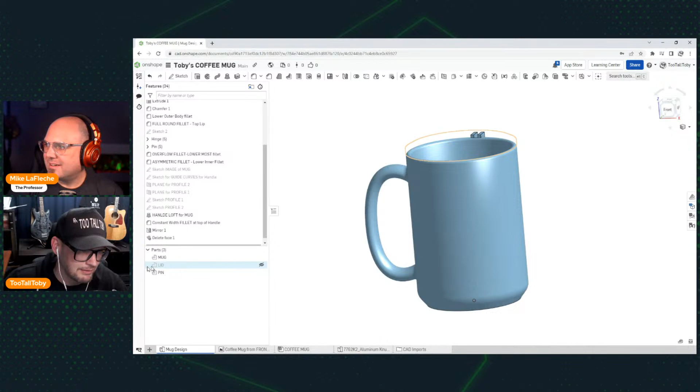I think what I would do with this is go to the mug now and adjust the appearance, maybe make it the Onshape green color. There we go. Hey, what do you think about that, Mike? That looks fantastic. That is a mug right there. Wow.

Now, I've been doing some stuff while you've been working as well. Instead of doing it while you were in the same workspace, I was doing it asynchronously, using what Eduardo was mentioning earlier, which was branching. I didn't want you seeing me hiding and showing my lid, I wanted it to be a little bit of a surprise.

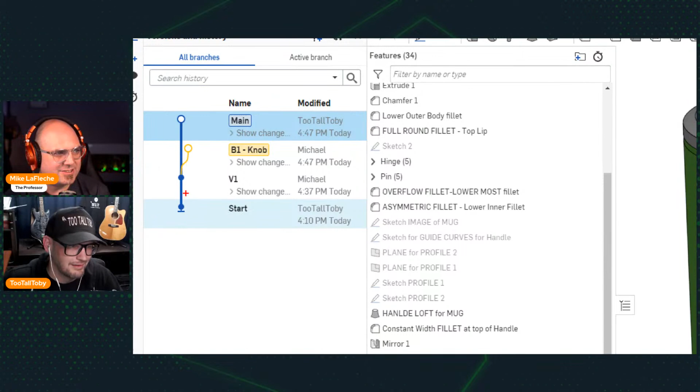So go to the version tree, and you'll see another branch here. I needed to design a knob, I needed to make some other modifications. This is pretty cool, so you branched off here. You can click show changes and see all the different things going on.

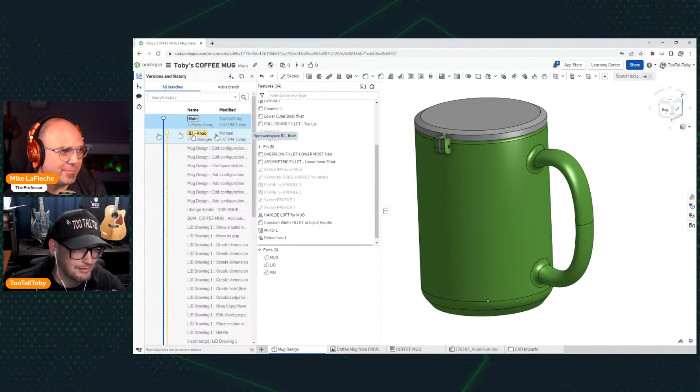Another thing you can do is compare what you have on your screen with the other branch. What does this mean though, it looks the same on screen. Well, we haven't gone into the knob, so you're still on the main branch, and I am on the knob. If you clicked on the knob right there, that would bring you to that branch, and you'd see that I've done some things as well. I also have drawings and imported parts, but I branched after you added the photo, that was when I branched. Anything you did after that isn't showing on mine, because you were on the main branch and I was on the knob branch.

So this could be useful if you thought you might have a good idea, but you don't necessarily want to mess up the original. You could do a branch here, and then how would you get it back into the main one if it turns out it was a good idea? First, let's figure out what we did, and you can compare.

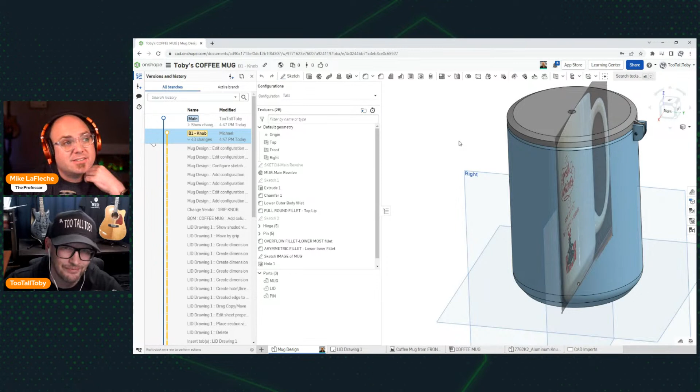If you click the compare button, which is below the document name Toby's coffee mug, you'll see a little symbol that looks like two. So you're going to compare knob against main, you click knob and click main, right here.

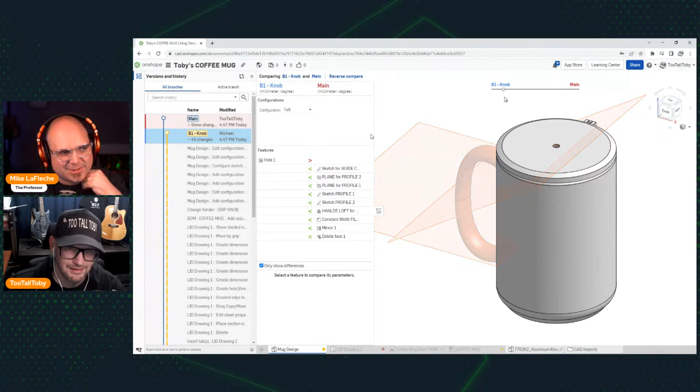Okay, it's showing us differences. At the top you see B1, knob and main, and that little slider menu. Drag that slider, oh wow. So I can see you've added the knob or the handle. You're not going to see the knob, but you can see I have a hole for a knob in the top, showing in red. And you can see the feature list is actually showing us the actual diff of the features, like add or remove. The slider shows you the graphical method of seeing it.

I even added configurations to this, see how there's configurations there? Tall, extra tall, too tall. So I can actually compare the different configured sizes as well. Oh, this is so cool, this makes it so easy to tell what the difference is.

You can click on each one of those things in that list too, and it would highlight, cross-highlight, and everything. See, this is my kind of coffee mug right here, the too tall version. And you can click on the features here too.

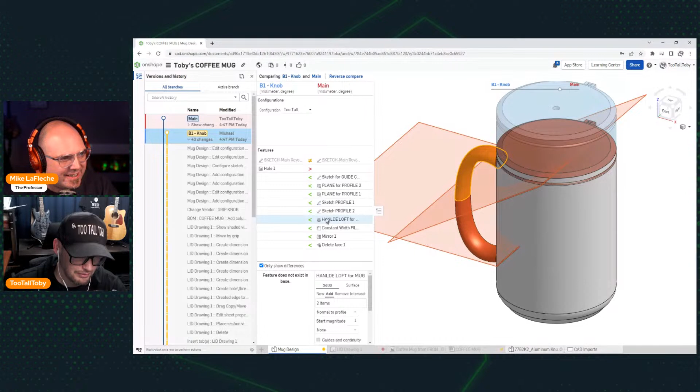So you get the details there, it comes in and really shows. Handy when you have a feature like a hole or a fillet. Click on the fillet, that one will be a constant width fillet there. Click that one, you can see right there it shows you width, magnitude. If you had an original fillet that started as a regular vanilla fillet, and then you turned it into a constant width, you'd see the metadata kind of differences between them. But now you have both on the screen.

Let's say we want to unite everything I did in the knob with the main. You go back to main, go over here.

Go back to main. Now right click on the knob and say merge in the current workspace, because main is the current workspace. It will give you a diff report, merge strategy screen.

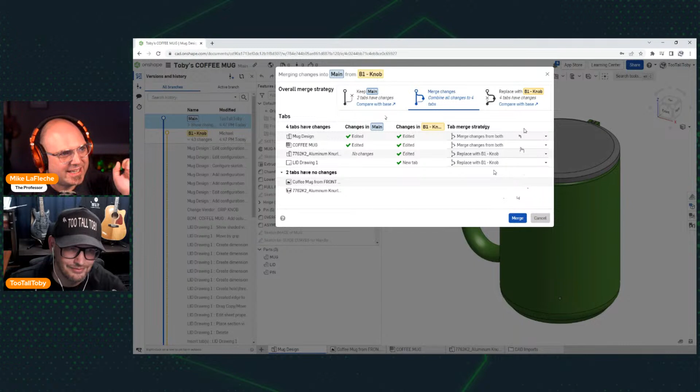Now it's showing you there's some other tabs that were added. I added a drawing for the lid. I went to McMaster-Carr and downloaded a knob, and made an assembly with it. You can see I downloaded a SolidWorks part for the knob, and uploaded the photo to the document. This is showing us we can merge changes in the mug and the part studio, and we're replacing, because there's nothing in the other one.

Now we're doing this all in the totally free version. And Patrick has a question here.

Is it possible to add this differences view to something like a change notice, or tie it into a workflow?

In the workflow, that's all part of the professional plan. But when you create a release package, you can compare in the release package, right there. That's one thing you can do to get to the differences view. Great question, Patrick. What we're doing here is all with the totally free one, just to get you started. But once you and your team know how that's working, you can always try the professional version to see what additional functionality you get from workflows, because we haven't even gotten into that.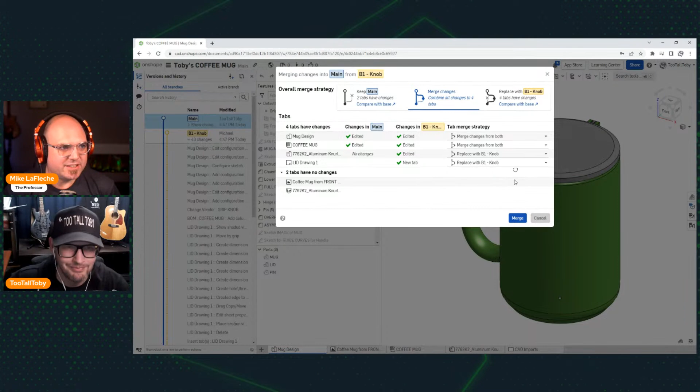So you just go ahead and merge it. I think it'll work, let's go. All right, there we are. There's the 'so tall,' and there's the 'too tall.'

Oh yeah, see, that's the kind of coffee mug I need right there. I need that extra half a cup, because I always drink the first cup, and then I need a little more, but I don't know if I want a full cup. Yeah, this was wicked, perfect.

Easy to add the configurations. There's a configuration tab on the right side of the screen, second one from the top. You see all the tabs on the right side of the screen, over here. So the second tab was a size configuration. I just configured the height of the sketch, but you could configure other things, obviously. I could configure the color, I could configure the material, I could configure if I wanted a knob or not on the top. You can have a matrix of configurations.

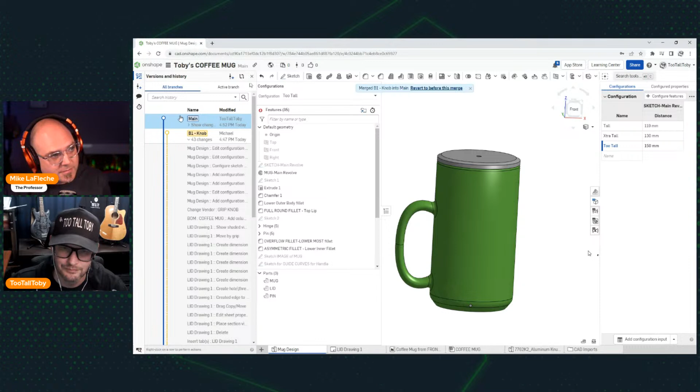You've used DriveWorks before, right, Toby? Sure, DriveWorks. It's similar to that, where you can have multiple choices of different options, right? Very cool, very cool.

So now from here, one of the things we were talking about earlier was that you were going to be working through and creating some assembly geometry and drawing geometry. Where would we find that? They're all scrolled right across the bottom there. You can see all the tabs: mug design, lid drawing. I made a drawing of a lid, and I didn't have to split it out as a separate file to do that. I just told it to create a drawing, created a section view, dropped a couple dimensions on. Nothing fancy, and that's that.

And then the mug, there's your mug. Oh yeah, that looks good. Best sister-in-law ever, right here. And then there's the assembly. So I took the contents of the part studio and just inserted it.

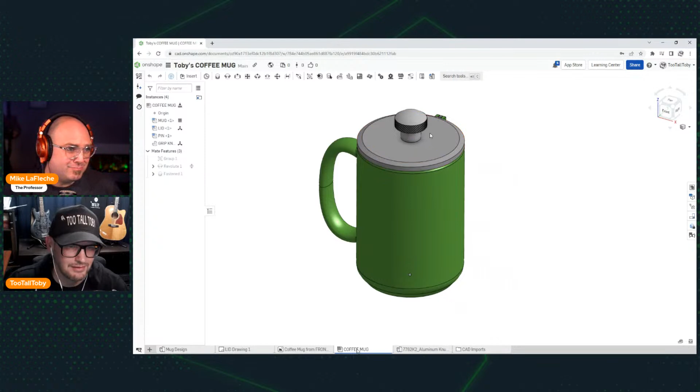Now, I could show you how I might put this together. Wait, so I'm making a change to the assembly here by opening it. Are you seeing that change on your end? Yeah, if I go to the main branch, let me hop in, because I'm still on the knob branch. So you'll see my head appear now. Okay, yep, I saw you.

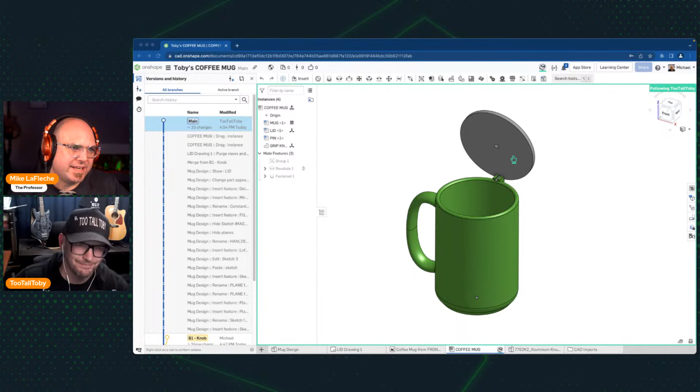I'll go to the mug, follow you, and show my screen. Okay, so that's my screen now. Alright, so now I'm gonna move this. Oh, and it just moves. What if you weren't following me, does it still just move? Because I'm changing the assembly, right? Oh yeah, it's changing. Wow, okay, because it's all writing back to that database. Every save, every time you do something, it's in the database, right? It's in the database, yeah. It's starting to click. Old habits die hard. Yeah, that Control S key, your hand is right there all the time.

Tall coffee mug and drink coffee while you're modeling. Yeah, exactly. Unless... well, you're showing your screen now, so maybe you could show us some more cool stuff to round out this presentation.

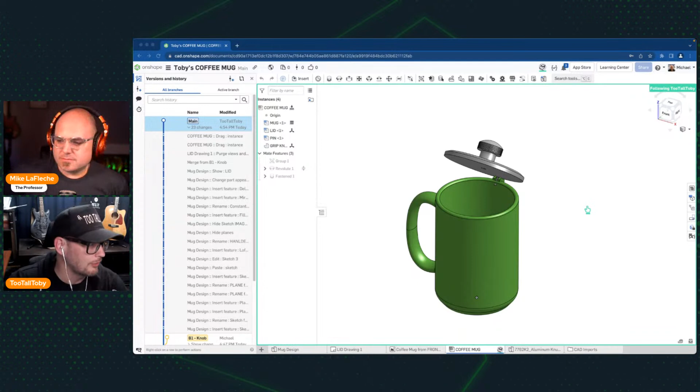I think we've had a lot of fun, but let's put this together. I know we haven't done too much assembly stuff yet, Toby. So to do this, it was ridiculously easy. I'm just going to create a blank assembly. You can create as many assembly tabs as you want.

I can insert everything from the mug design studio, which I renamed mug design. I can pick which configuration I want to build an assembly of, so I'll pick the too-tall one, and pick those 3 items from that part studio and drop them in. Now, of course, I would call this the mug.

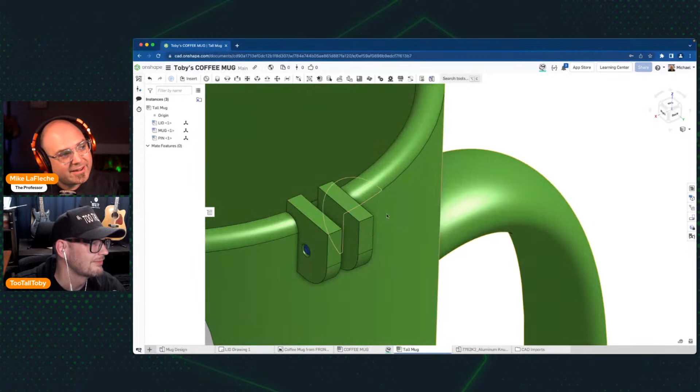Right now it's not mated, everything is just kind of out in space. It came in place because they were designed that way, and the pin is already exactly where I want it because I designed it in place. So all I have to do is group them together, like it was almost like a PowerPoint slideshow. Oh nice, yeah, that's good. It's already really there.

So why put a coincident and a concentric? There's no real motion on it, it's just a pin, it's static. So it's okay, they move together, but they will move — like if the mug is not fixed, then they will still move. Okay, it's not fixed, but they move together. So I should fix the mug. Good call, yep, so it doesn't float off the table.

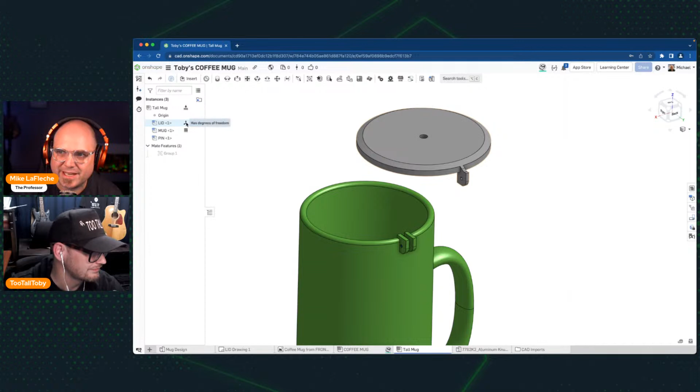But this is the only thing left. You can see a little symbol here showing me it's floating, has degrees of freedom. Over here is where I want to mate it. I'm going to use something called a revolute mate, which is like a concentric and a coincident. As soon as you hover over anything, Onshape wakes up these datum-looking symbols, called mate connectors, showing what it thinks is good things to mate from. I'm finding the center of that cylinder.

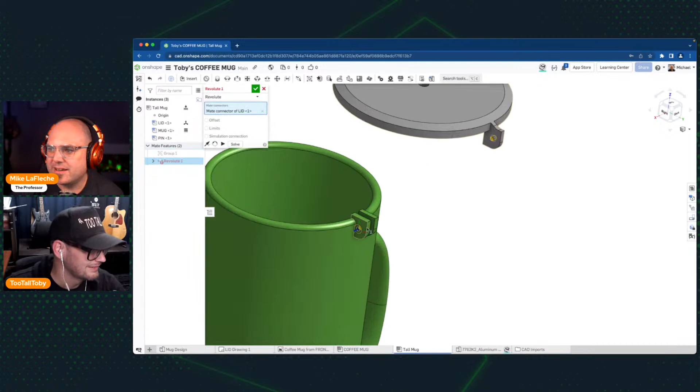See, it's waking up the center of that cylinder there. When I hover over that edge, I could pick the circle itself — it doesn't matter, it's all the same geometry, it was centered. I zoom in over here and I already have the pin in the center of that. Just pick that and it's done — that's mated fully. That's it. I could go into the Revolute and set limits on it, giving it a range of motion so it's not going to go too far.

And then I would insert — so I went to McMaster-Carr while we were waiting and downloaded a knob. You did all this while I was making the mug? Yeah, there was nothing in here that was pre-cooked. This is so cool.

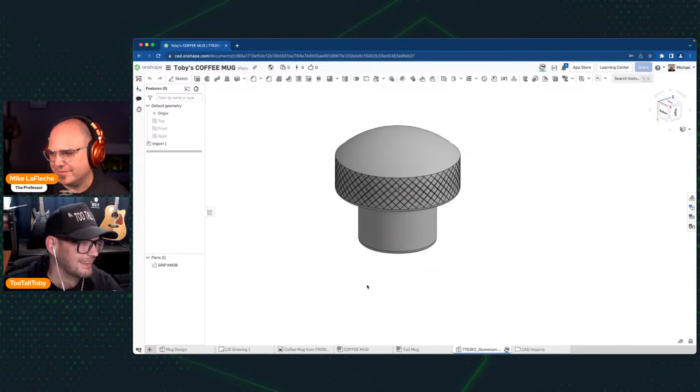I did that, and we'll insert that knob I had grabbed in the other studio, and snap that right on. This is a fasten mate — it's all the degrees of freedom. I just need to flip it, but that's it, that's fully mated to it now.

And bill of materials — let's go over here and add a name, material, mass, vendor. We'll remove that, but you see what we got in here. The BOM and the assembly are one and the same in Onshape, there they are. There's the mass, because I had set the material on the parts too while you were working on the mug. That's cool — so one person could be doing the geometry and the other person going through doing the metadata. Yeah, that's very cool. And how much is this?

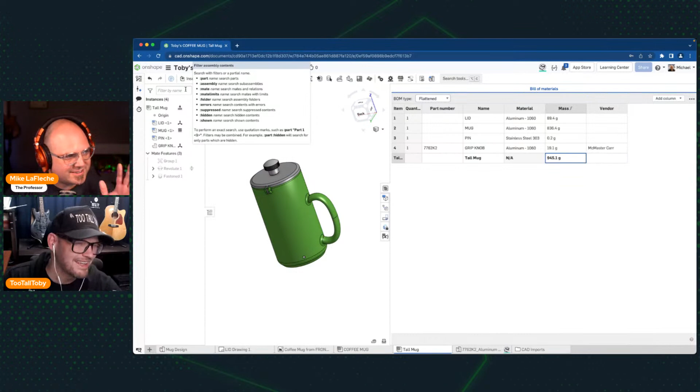It's 945 grams. Did we meet the Too Tall Toby challenge? Yes, that is correct. Okay great, well done — you know how long I've been waiting to hear that, Toby? Oh my gosh, that is the correct answer.

So all this metadata stuff, custom properties, you can add to this — it's pretty easy. On the professional plan, you can have it automatically assign part numbers and have drop-down lists of properties, stuff they used to have with a PDM. Yeah, we're having a lot of fun. Yeah, I mean, this is awesome.

We talked about it - you should make this a public model, and we can link it right here in the show. Let's do it. So we'll go into our main mug design here, and then just share. It's already a public document because it's free, so all you have to do is turn on link sharing. You can just turn that on, and boom.

That hyperlink right there, you could stick that right in the chat, and everybody's going to have access to it - not a copy, but access to the image of that beautiful mug. So we'll drop this in the chat, and anybody can get that exact point of view, open it, look at it, and take a copy for themselves if they want to make their own mug.

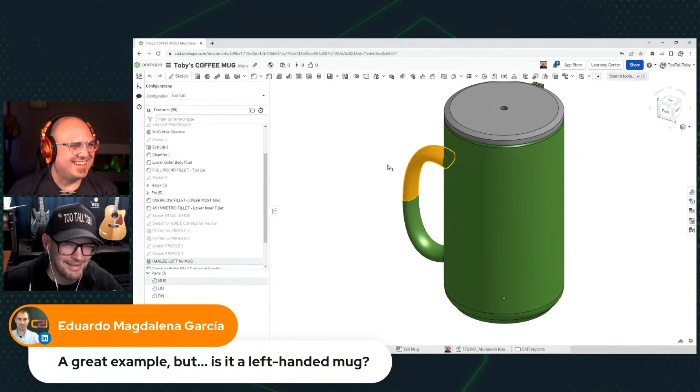I want to say thank you to everybody for joining us, and if you have any questions, let us know. Huge shout out to Eduardo, who I think gets comment of the day - he said it was a great example, but is this a left-handed mug? After he said that, I kept looking down at the mug, and I kept thinking, I think Eduardo's right - you'd have to drink it holding the handle here.

No, that's exactly where you should put it, because that's where your Control S key is usually, on the left. Oh yeah, good point. Wow, yeah, I think that's awesome.